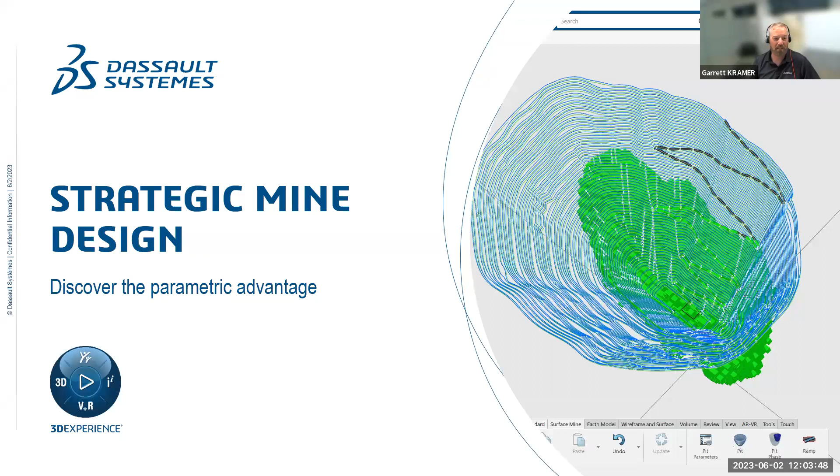Essentially, discovering the parametric advantage in mine design. So, table of contents: I'll briefly introduce Dassault Systèmes, describe our mining portfolio and the solutions we offer to the mining industry, then talk about the difference between traditional versus parametric design, followed by an introduction to our Surface Mine Designer role and its advantages. Lastly, I'll cover our parametric underground mine design solution.

Okay, so first, a little bit about Dassault Systèmes and myself. We are what is called the 3D Experience Company. It's a French organization, and we are really a purpose-driven company. We think of progress and innovation in terms of the balance and impact that we have. So as we create value, we always take into account what we are taking from our planet. Harmonizing product, nature, and life really lies at the heart of everything we do and the tools we bring to the world.

We have about 20,000 really passionate people from 135 countries across the globe, and these are really the heart of the company. These people share similar values and similar passions for innovation and doing things in a better way. We also have a large R&D team connected across 72 different laboratories globally.

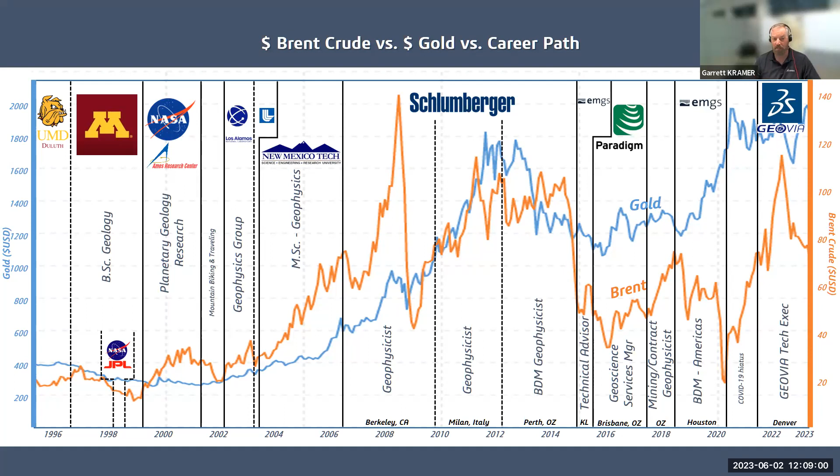So back to a little bit about Dassault Systèmes. We have a profound belief that the virtual world extends and improves the real world, and achieving a more sustainable future is only possible by leveraging virtual worlds. In life, there are no rehearsals, so we need to build these virtual worlds, simulated environments, and model these things to be able to evaluate impacts before either producing a product or taking a decision on a business process. These virtual worlds really help people imagine things differently.

So we aim to inspire and really help customers create and build a more sustainable world. It's not only for people at home or at work, but to create smarter places to live, for citizens, for managing resources, for managing energy, and taking a long-term view of all of these things. Essentially, at Dassault Systèmes we are committed to using virtual worlds to help better understand and simulate how products, nature, and life can interact in harmony.

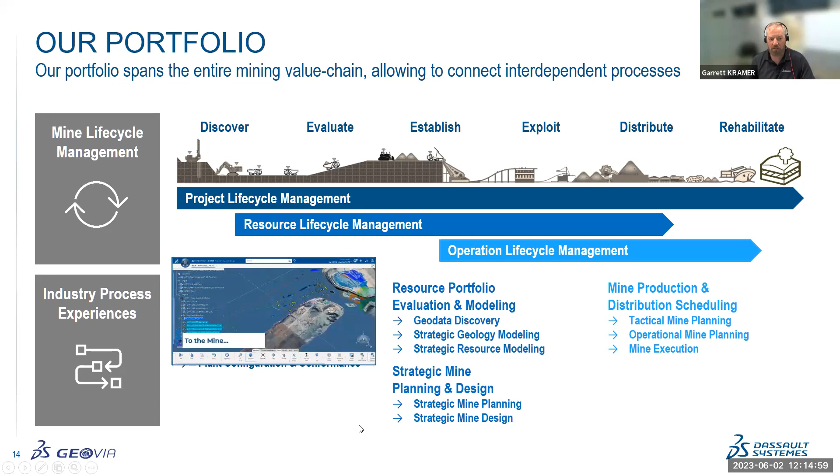So our cross-brand solutions really enable the mining businesses to unlock sustainable value, not only by focusing on geologic and mineral processing, but also covering project governance, work management, immersive visualization, and the multi-stakeholder collaboration tools that are required.

And drawing on our experience in the civil engineering and construction industries, we've developed a parametric mine design tool that uses the 3D Experience platform and one of our sister brands, CATIA, in their 3D design applications.

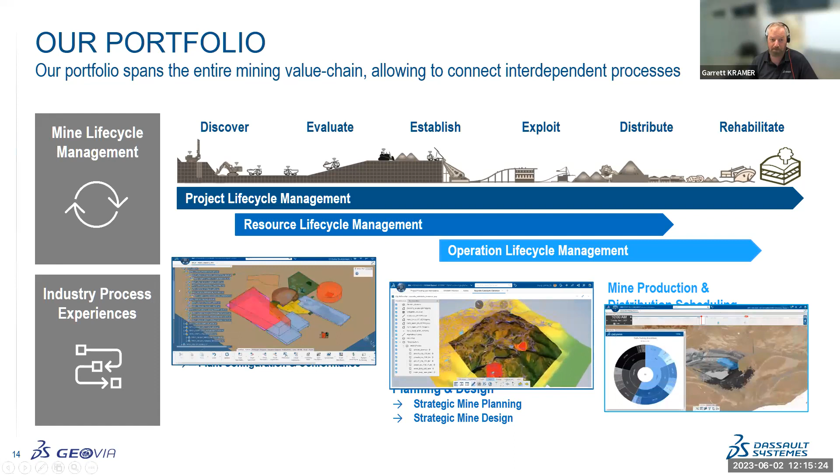Now, traditionally, Geovia has been known for our products, and we're going through a bit of a transition now. You've probably heard of Surpac, Whittle, MineSched, PCBC, Minex. We've essentially transferred all of these product-based offerings into more functional role-based offerings.

Culminating around geoscience modeling, mine design, and mine operations, and that covers a lot of the functionality that we saw within these different products. Other functionality is directly translating over into the 3D Experience platform.

So on this journey, I would say we're somewhere along the spectrum, depending on the functionality. But the ultimate goal of Dassault Systèmes and the Geovia brand is to move away from just these desktop-based individual solutions, individual software programs, into more of a functional role.

In the future, the Geovia portfolio will leverage tools from all of our different brands within the mining environment—leveraging the structured collaboration and project management tools on the north side of the compass, the 3D modeling apps on the west side, and the multi-physics simulation and geotechnical work done with Simulia, which is already integrated in some of our solutions. Information intelligence and the ability to communicate and understand current market trends will also be important in the collaboration within the 3D Experience platform.

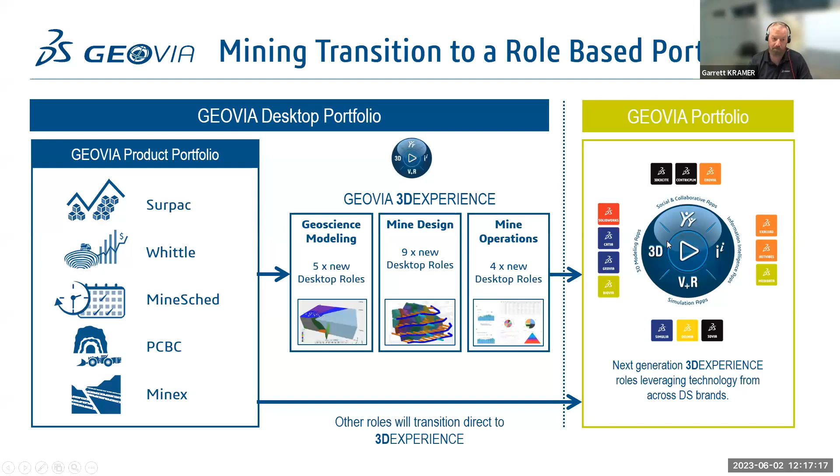So moving on and coming back to the future of what we see in mine design, let's look at the comparison between traditional and parametric mine design tools. Looking at the concept of parametric mine design, let's see how to accelerate the creation of underground mine and open pit designs.

A successful mine design depends really on two things: gathering all the available geologic, geotechnical, mining engineering, mineral price, and regulatory information, and creating a design that efficiently, economically, and sustainably accesses the mine production areas.

However, it has been a manual, time-consuming process. Traditional CAD-based mine design, although powerful, can take very long to produce, and that data may already be out of date by the time it's finished. The mine planner or mine design engineer must then build a whole new design to incorporate the latest knowledge, using up still more valuable time, potentially weeks or months of manual work.

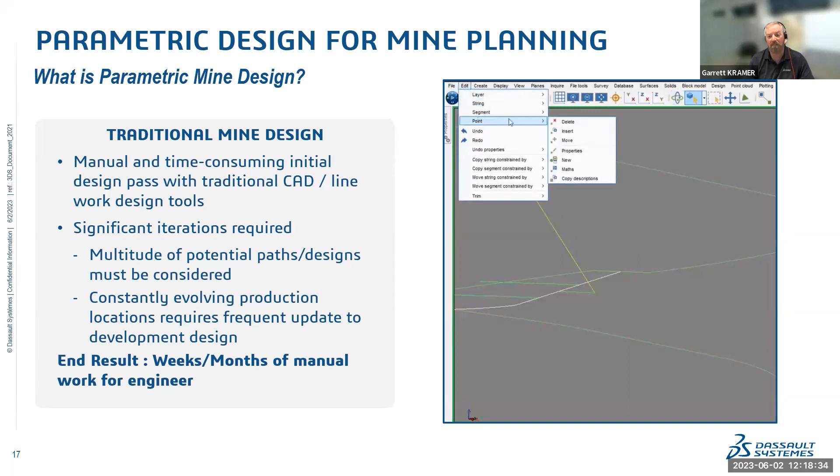So we have worked on automating some of the process—taking inputs such as geological solids or ore bodies and creating templates for things such as level access, ramp designs, stopes, or ring designs. We can connect these through a ready-made role with different apps or functionalities, or custom templates, parameters, and some custom scripting.

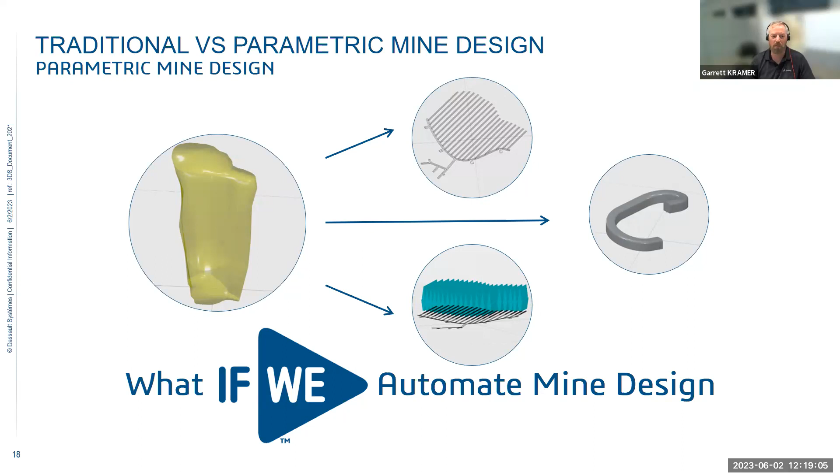And parametric mine design can eliminate some or maybe even the majority of the manual work required in CAD-based design. This allows mine planners to create a number of potential paths or designs rapidly, making an essentially infinite number of refinements to reflect changing data as it comes in, all without losing previous design work. So we get a parametric design model that automatically updates when we change a parameter.

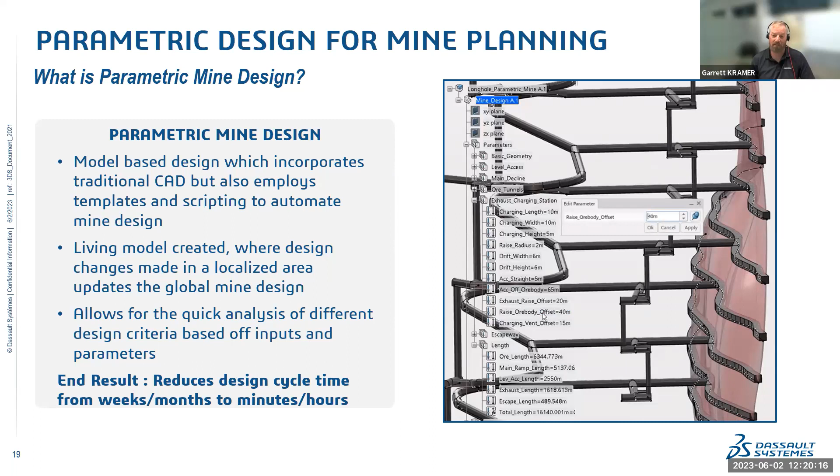So we're leveraging traditional CAD, but we're just automating some of the steps within. Ultimately, a change locally will cascade through the whole design, allowing us to do analysis of different scenarios very quickly. This reduces the design cycle time from months or weeks down to hours or minutes—that's what parametric design is all about.

So what's the advantage of this automation? Traditional design is a mining industry standard, with lots of expertise and empirical know-how built up over the years. There's a large pool of mining engineers who study and perfect their skills through university courses with this design experience. However, our customers and the mining industry in general realize this is a real time-consuming manual process.

When a change is required, a large portion of a design needs to be redone. A change in bench height, for example, or a ramp inclination or a vent raise can result in potentially a month of rework. And so it doesn't allow for a quick analysis of multiple scenarios.

The parametric design, on the other hand, allows for speed and accuracy. Once you have a model built, you can change what you want or update any of the parameters and create a new mine design relatively quickly. This time saving really helps with reducing the demands on an already resource constrained industry. Mine engineers can quickly make changes and be freed up for other important tasks.

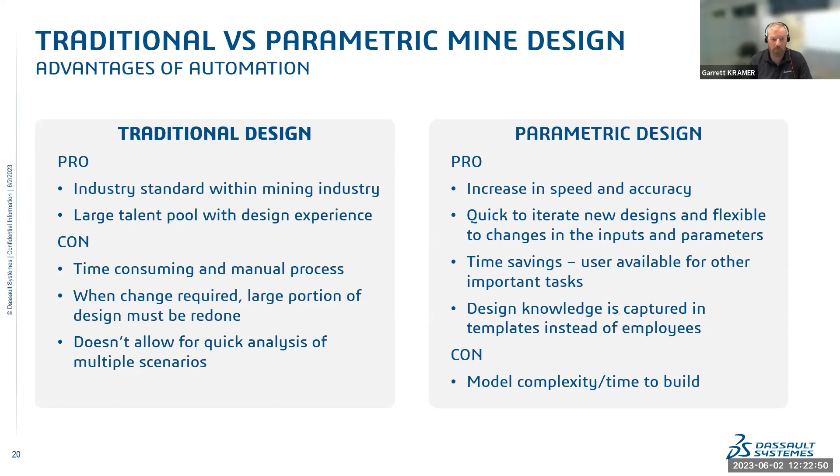So let me now introduce the Dassault Systèmes Geovia Surface Mine Designer role. It's really built on the 3D Experience platform that I mentioned earlier. So it's all, you can think of it as cloud hosted. And it's a collaborative environment that connects all the users together.

We have a centralized data storage in the cloud, which means a single source of truth. So you're not using an outdated emailed file that you received last week. And we can also communicate and have structured collaboration and project management tools associated on this platform.

And what this does is it gives us a catalog of applications for mine design or simulation. These applications can be defined by a person's role within the business, so they only get access to certain functionality or applications required to execute their role.

In a typical workflow for parametric mine design in an open pit environment, for example, we start by setting up the mine site definition, setting up a common structure for the operations, safety rules, naming conventions, etc. Then we can import and validate the key mining data, the geologic model, the surfaces, polygons, etc. - anything required as information for the design effort.

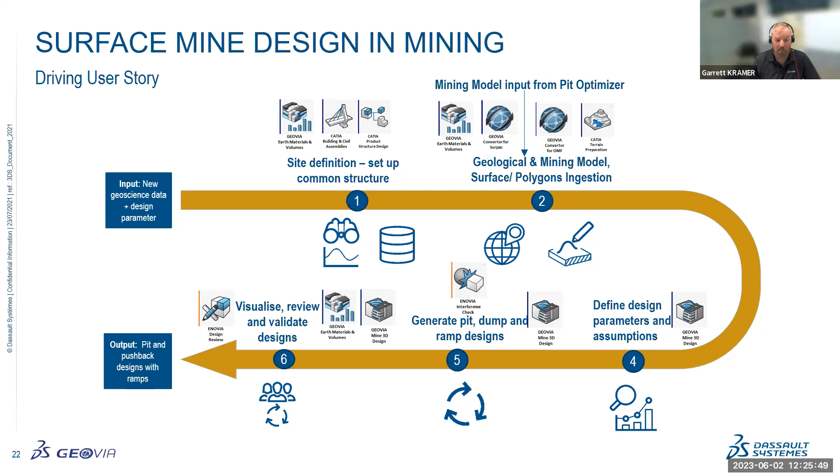So now I'll run a video covering the highlights of this role. You can see how it can parametrically generate multiple outcomes to identify optimal designs. You can include pit slope standards and geotechnical criteria to develop safe designs. You can develop technically robust pit, dump, and ramp designs linked to physical constraints and geotechnical features.

It also provides transparency and data model continuity between optimized pits and practical designs, and you can significantly reduce your design time. So the automated parametric process can be used to essentially generate and evaluate multiple pit, pushback, and ramp designs with this role.

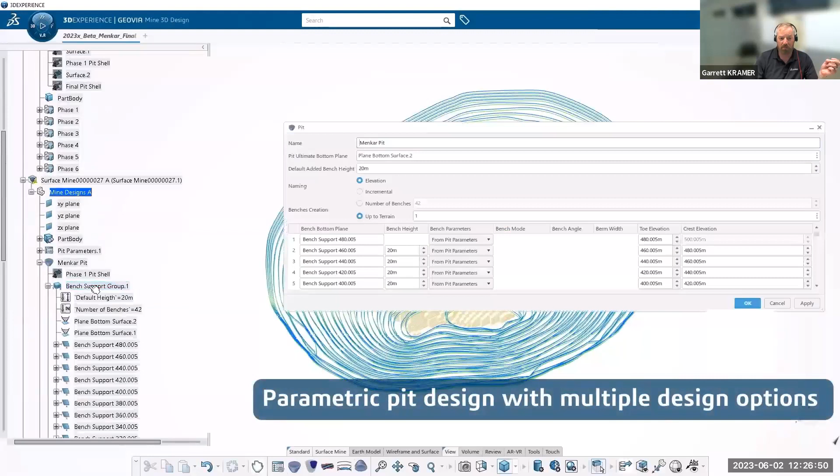And so you can essentially define default bench heights, plus berm types, bench angles, berm widths, and how they are repeated.

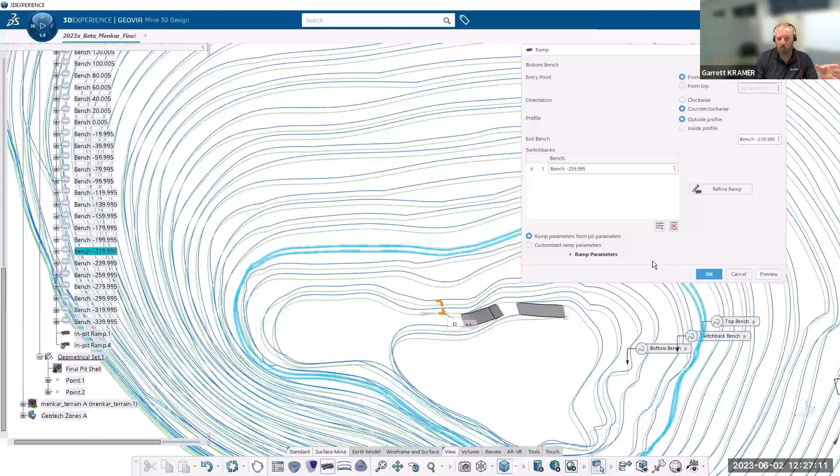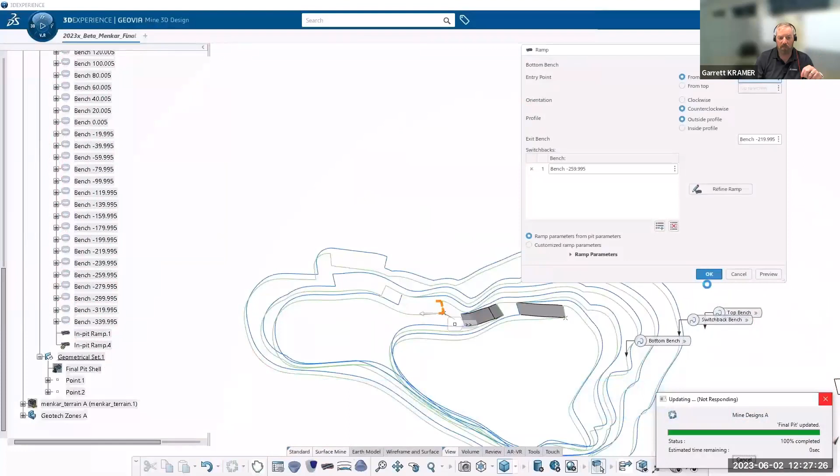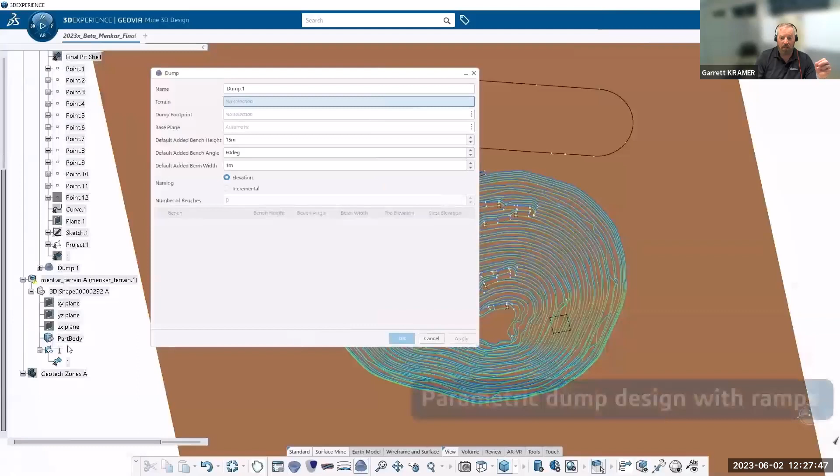Ramps can be designed from the top to the bottom, clockwise or anti-clockwise, with an outside or inside profile, and whether the parameters are from the pit design or customized. Once a parameter is adjusted or modified, the design updates automatically. Adjustments can be made to specific ramps, including the berm access, the taper distance, switchback location, the inclination or ramp rate, width, and radius. Geotechnical zones can be configured for safety and will automatically adjust the benches, based on the region, volume, or contour.

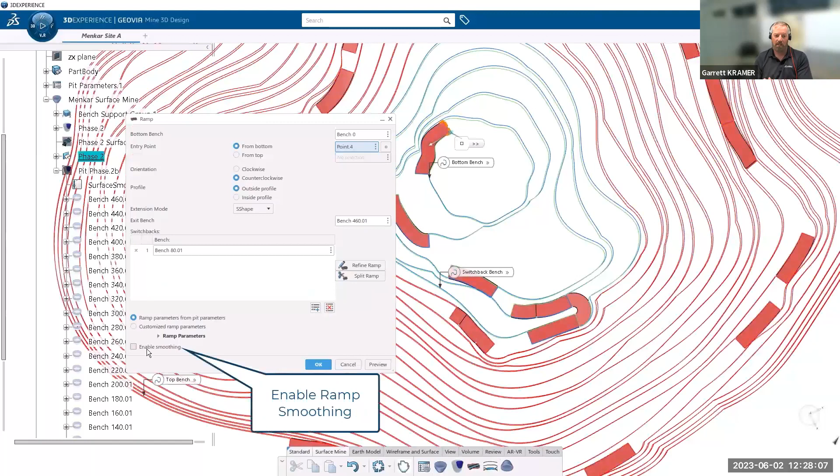The role also includes dump and stockpile designs with ramps, including the entry points. The solution provides improved haulage efficiency through a ramp smoothing process, and it can also create safe pit designs through pit wall smoothing algorithms. That'll come up in a second.

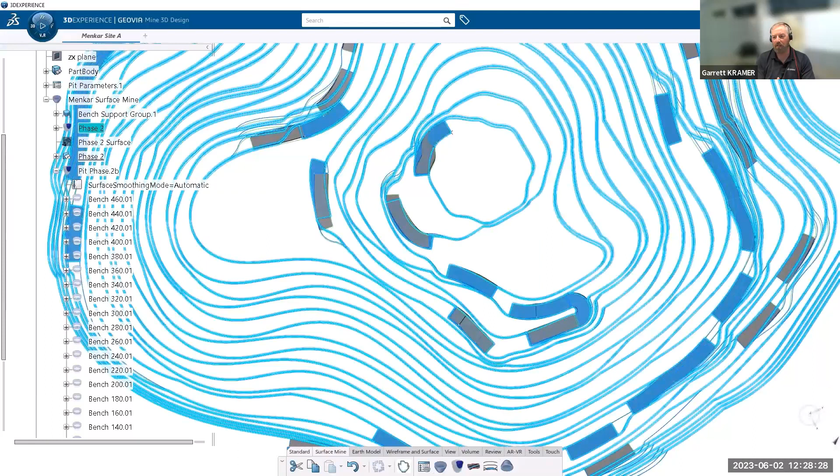So you can see how this parametric process is automatically updating this open pit design, and it's very efficient compared to traditional methods.

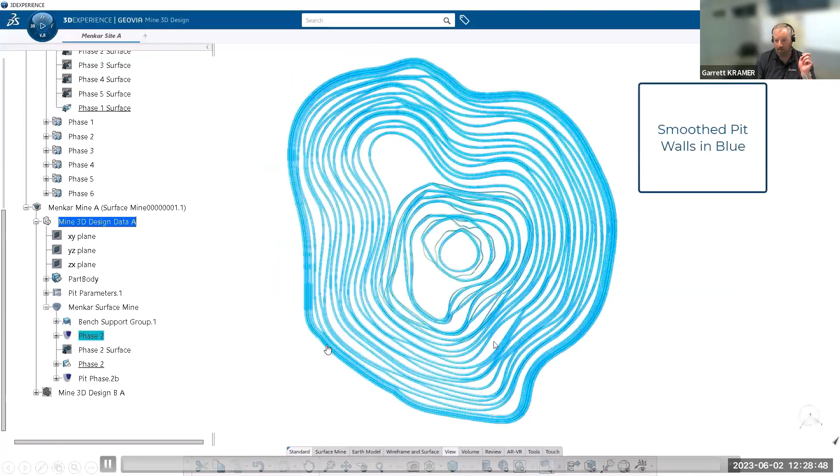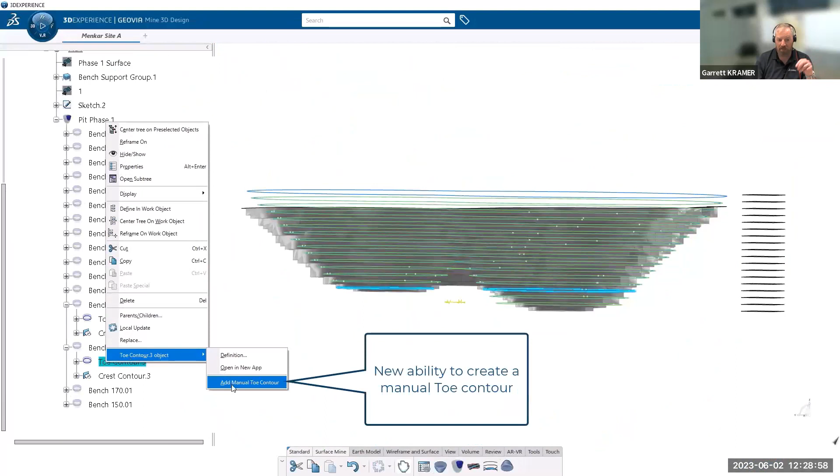And lastly, it can also create safer, more efficient, and practical pit designs through essentially bench string modification. So we're going to essentially connect these two bench profiles.

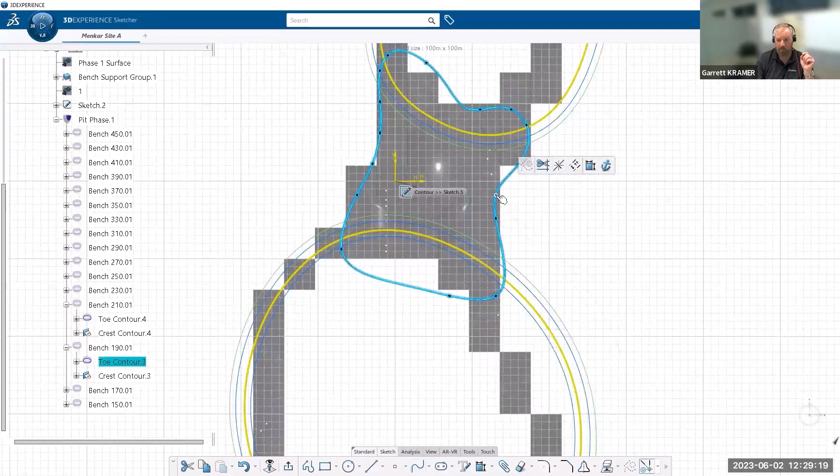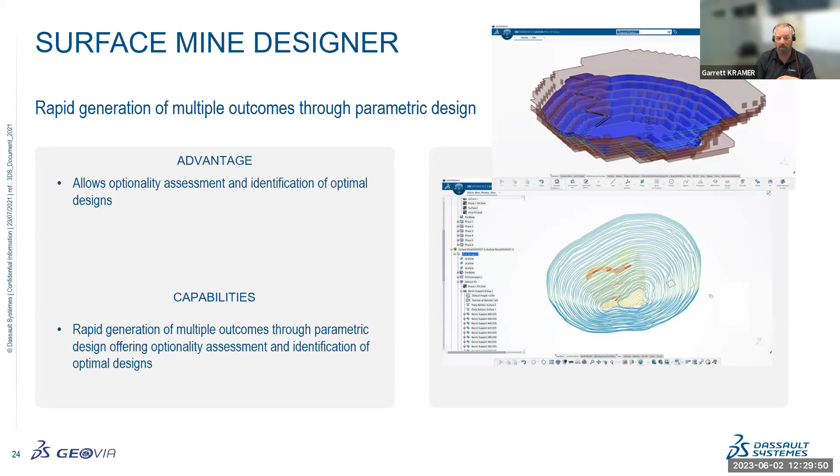So really the surface mine designer role provides the advantage of optionality, and assessment and identification of optimal designs through rapid generation of multiple outcomes for your pit, through this parametric design process.

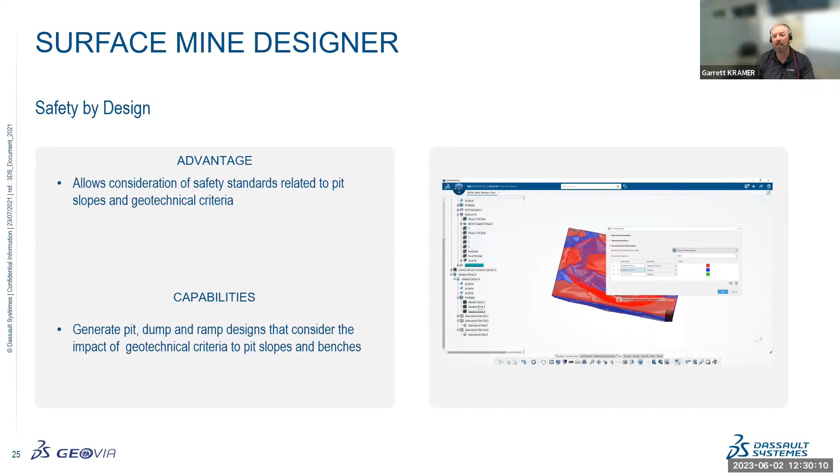It allows consideration of safety standards related to pit slopes and geotechnical criteria, by generating pit, dump, and ramp designs that consider the impact of this geotechnical criteria on the pit slopes and the benches. And it unsilos that information from one individual user.

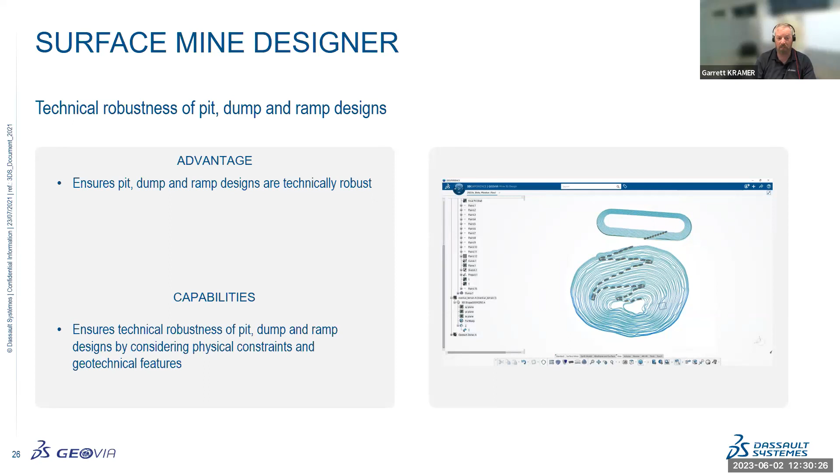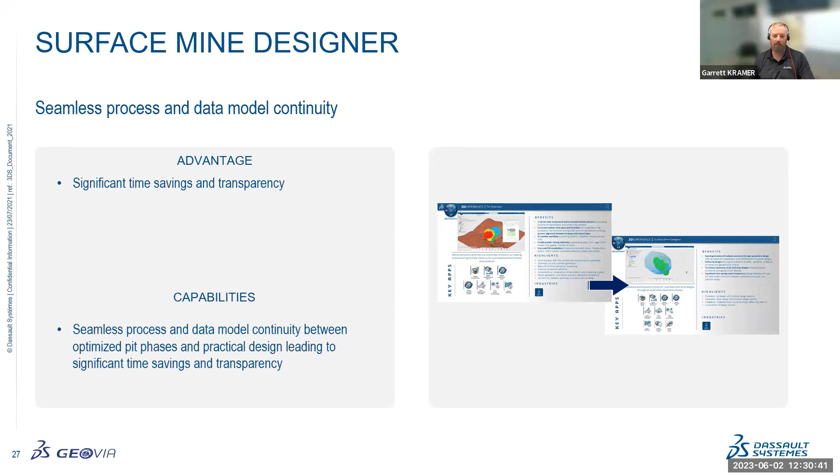A further advantage is that it ensures pit, dump, and ramp designs are technically robust by considering all the physical constraints, including the geotechnical features. And importantly, the surface mine designer really delivers a seamless process and data model continuity between these optimized pit phases and practical designs, leading to significant time savings and transparency in this process.

So it really addresses multiple business challenges. It allows you to plan for the safety of your people and equipment by ensuring the mine designs honor the geotechnical constraints, demonstrating that you're addressing increased focus on health and safety.

It really allows you to build value-based planning and to minimize waste handling across multiple horizons, and deliver on performance metrics and return on investments, demonstrating that you're addressing increased stripping ratio and rising input costs.

And lastly, it really plans for sustainability. It allows you to make a positive, or less negative, impact on the environment, and it employs good governance, demonstrating that you are addressing your ESG priorities.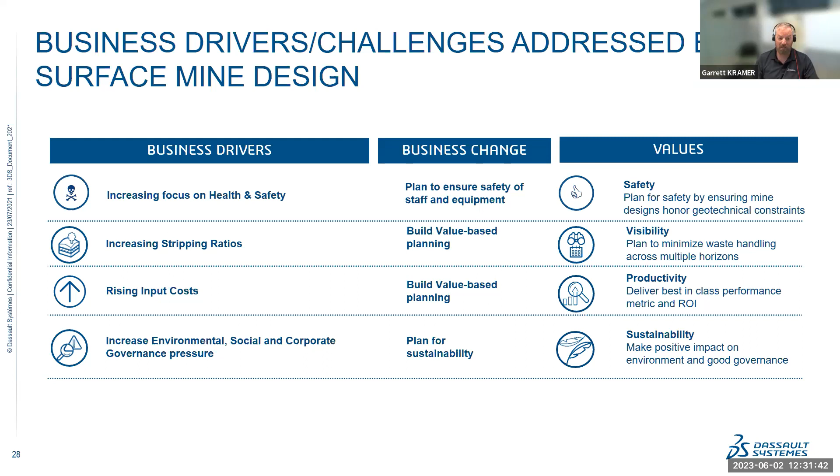So what this surface mine designer role really allows you to do is rapidly generate safe and practical pit, dump, and ramp designs. And it's quite an interesting tool.

So let's move underground now to an example of a long hole stoping operation that's looking at the electrification of the mine. This client was not really sure of the impact different equipment would have on the drift size, the ramp gradient, offset requirements, etc. They want to try out different options and quickly update the mine design and be able to analyze different designs and figure out a way forward.

In this video, you're going to see that as we update and change any of the parameters, the entire design is fully updated. We're using 5 different templates for ore access drives, level accesses, ramp gradients, exhaust and charging stations, and escapeways.

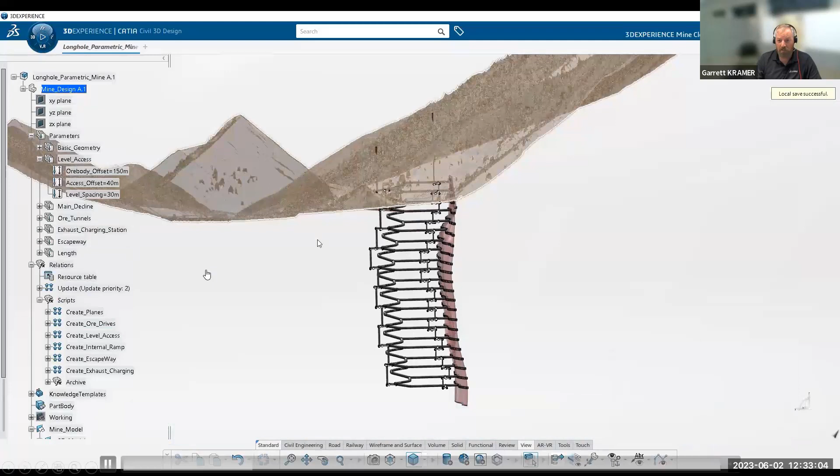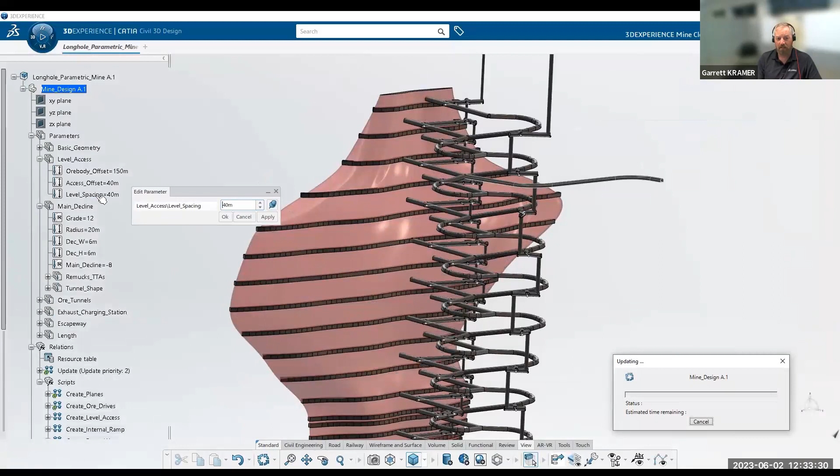Coming up here, you can see how the mine design is automatically updating. Ultimately, we want to change the access level spacing, increased from 30 to 40 meters, coming up after we change the decline. So here we're going from 30 to 40 meters, and it automatically updates the ore drive, the level access, the charging stations, and the escapeways.

If traditional manual methods were used in this case, it could take a month to do all this work. With our parametric mine design solution, it really only takes a couple of minutes. This is a radical step change in the approach to mine design.

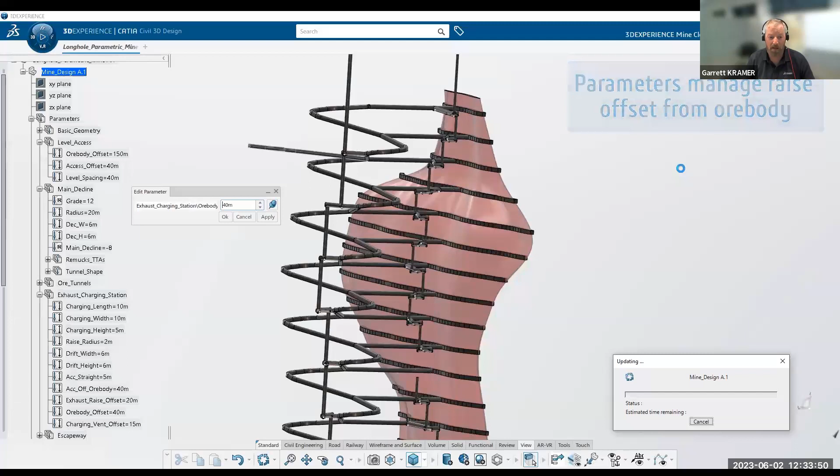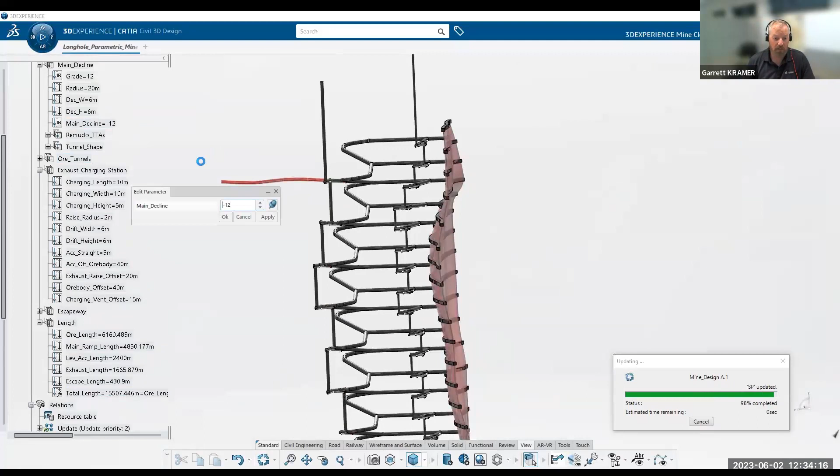The solution also captures the output parameters that are calculated automatically when we change one of these input parameters. For example, when a ramp angle is changed, the total length of all the development increases or decreases. We can also include volume, cost calculations, or any other key parameter required. These are all controlled essentially by a series of scripts.

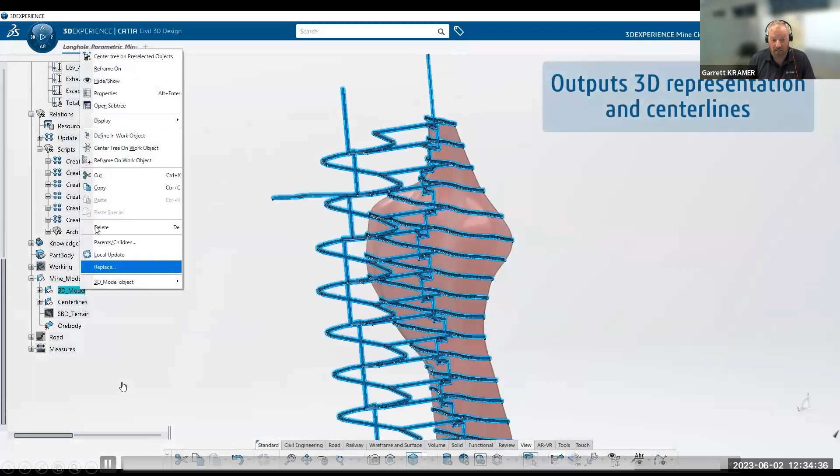Additionally, it can output these 3D models and center lines for use in downstream processing, such as tactical scheduling or more short-term scheduling, whatever you might require for the future.

Now on to a case study where we've employed parametric mine design. We were working with Hecla, and in fact there's a webinar that's been delivered on this specific project that goes more in depth. I'll just give you a brief overview today.

Hecla's Lucky Friday ore body in Idaho is roughly 4,000 by 2,000 feet along strike. It has a lot of legacy workings. It's a really large area for them to design for, and that's coupled with them also changing to a new mining method that they've determined to be more efficient.

Typically they do an annual update on a long-range strategic plan just once a year. What they really needed was to quickly evaluate different design permutations—essentially, they wanted to understand, if they do this, what does that do? When we applied parametric mine design tools to this challenge, the outcome was a significant reduction in the design process for them, from weeks to hours.

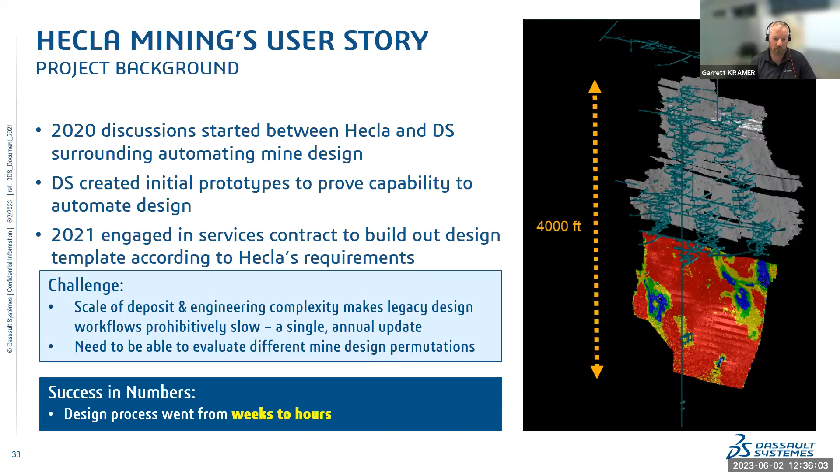Some of the low-hanging fruit we aimed to address for Hecla specifically was automating some elements of the design at the Lucky Friday—the number of spirals, the spacing of the spirals, and the number of access or slot points per ramp segment.

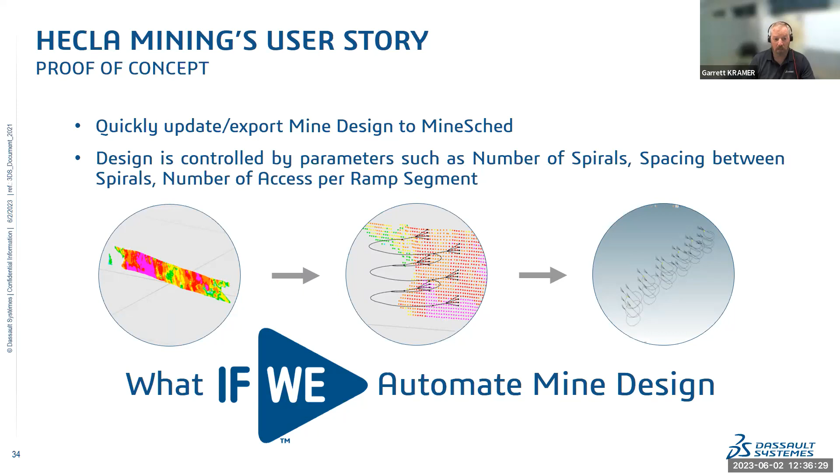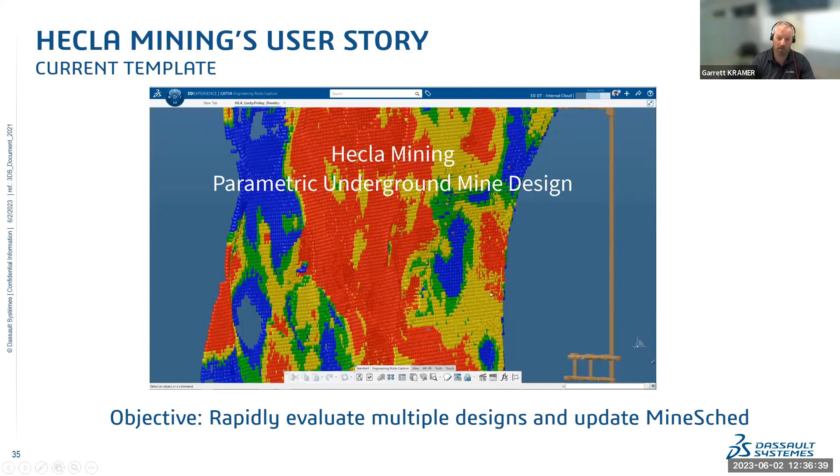I'm going to show a video here. These are the stopes that we started out with, and we bring in a reference surface. This reference surface really represents a comp surface where the development needs to intersect with the stopes.

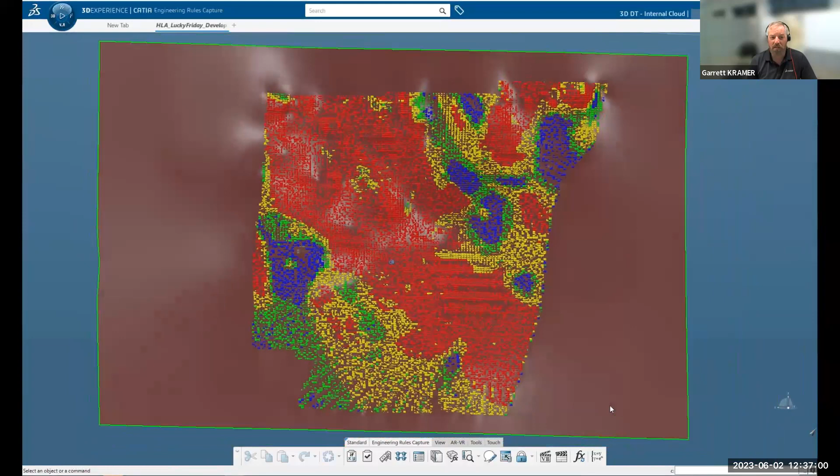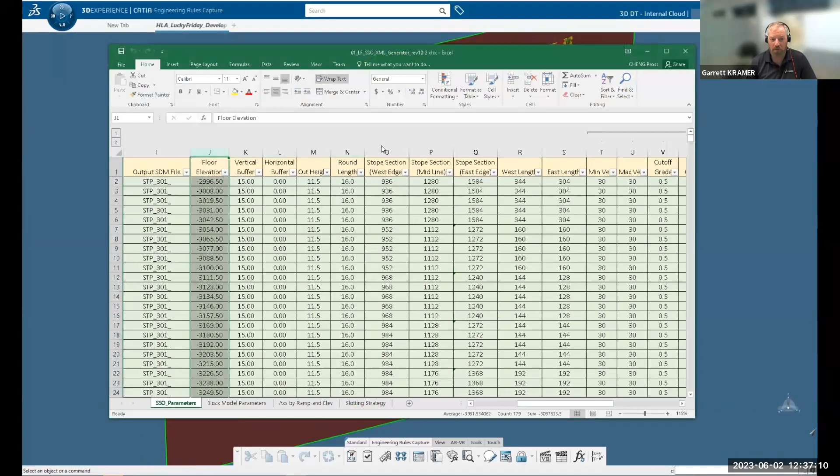So we take this input information, we run the scripts that were generated for this specific use case for Hecla—we're making use of stopes and elevations.

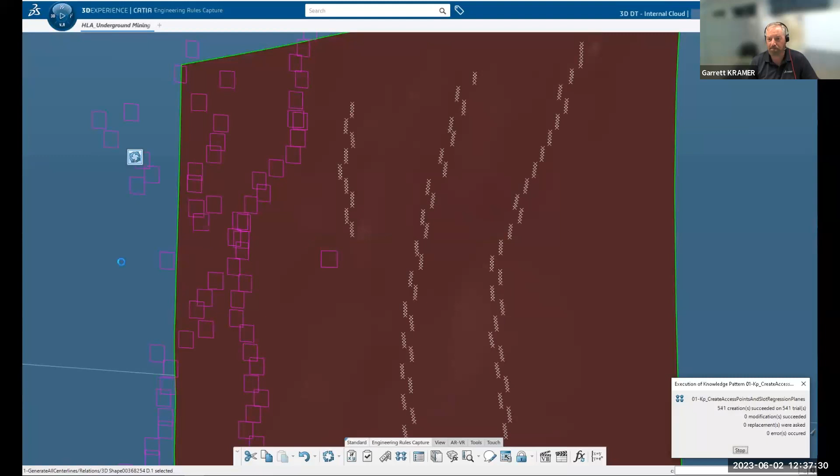What this script has done is create all the point intersections, and then it creates the development lines coming off those intersections. After that, it creates the double slots, where a single ramp accesses essentially two sets of cuts, and then finalizes all the development within that.

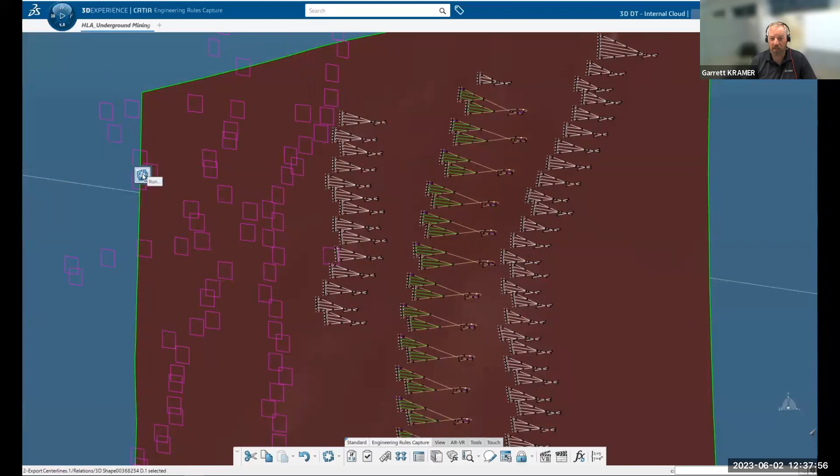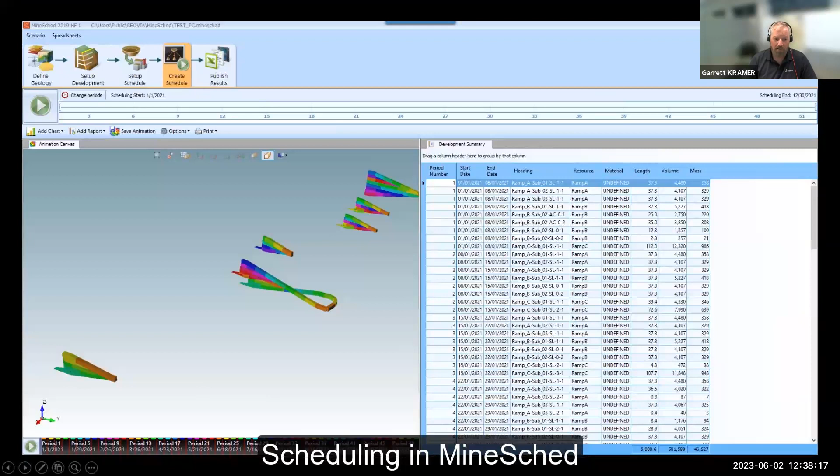We can then export the string files to our tactical scheduler. This parametric advantage has allowed Hecla to rapidly evaluate multiple underground designs.

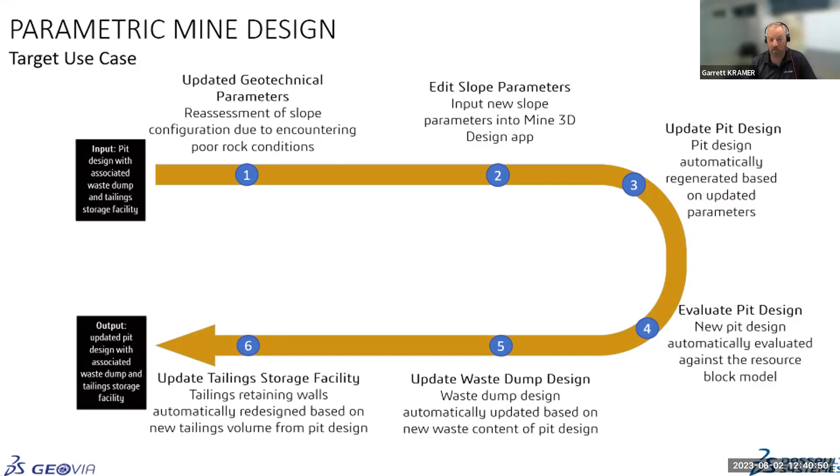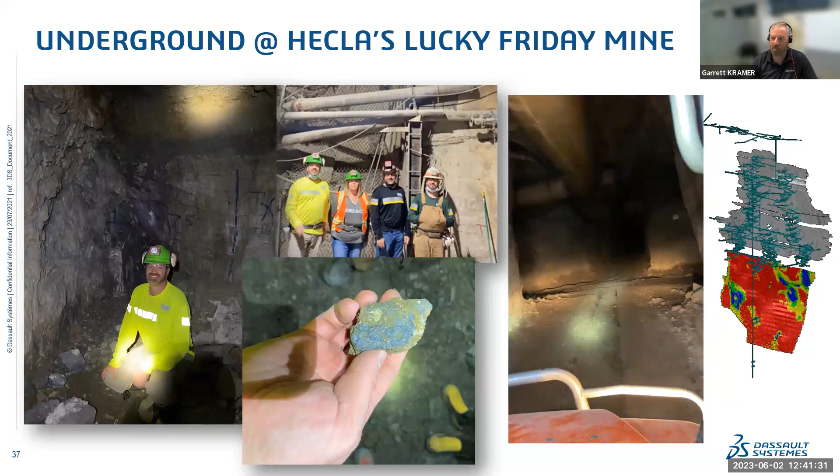Thank you, Garrett. It was really, really interesting to me. I'm not a mining engineer, I'm a metallurgical engineer, and I do sustainability. And I loved your presentation.

You showed on slide 28 that one of the goals is enhancing ESG and sustainability. So my suggestion is, if using parametric mine design can give us an optimized system in terms of designing a mine, what if you add a feature in your software tool to quantify the CO2 emission?

Yeah, it's certainly been an active discussion. What I reviewed was specifically parametric mine design tools within our portfolio, within what we call this Industry Process Experience, Strategic Mine Design. We have another IPE called Strategic Mine Planning, and this is where we're actively working over the life of mine to incorporate CO2 emissions, the difference between electrification, and how you would optimize these different processes and decisions for each specific mine.

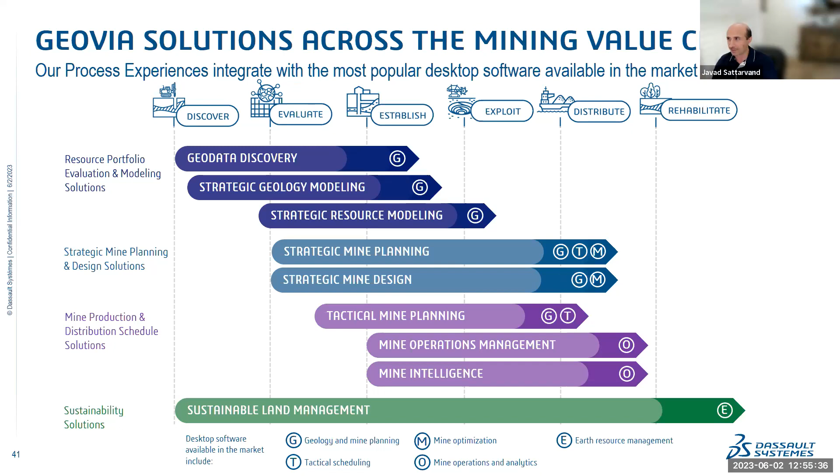There are groups of people in academia working on bringing stochastic modeling instead of a deterministic look at the design, bringing the uncertainties of exploration, block models, and even the stochastic nature of other technical parameters, geotechnical or metallurgical parameters, into design. There's still not any tool in the market incorporating all these things into the design. Is there any plan at Dassault in that regard?

Let me say that we are aware of this. We are looking at all these different algorithms, and we're also aware of what our competitors are doing. My answer to you, Javad, would be, it sounds like a pretty good business opportunity - that if you wanted to develop a program, or potentially work with an organization like Geovia to help develop that program, it sounds like an opportunity within the mining industry.

Great, Garrett, I appreciate all your elaborations. Excellent, thank you for the questions.

Are there any other questions? I'll take that silence as a no.